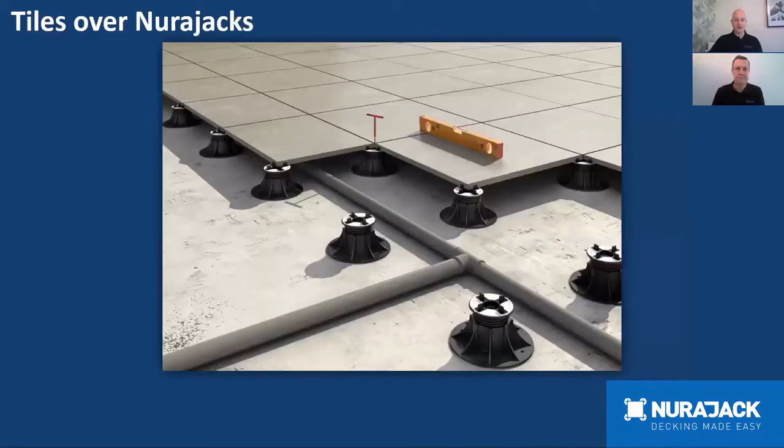Now, some of the features of the Nurajack system. By using Nurajacks, you can create a level deck surface over a sloping substrate and create a level entry into the home. The head of the Nurajack self-adjusts to 4.5 degrees, and each Nurajack takes around 1 ton of weight. The height can be easily adjusted just by winding the thread up and down, or, as you can see in the picture, using the adjustment key in between the tiles to make minor adjustments to the height. And we're very proud to say that Nurajacks are made from 100% recycled materials.

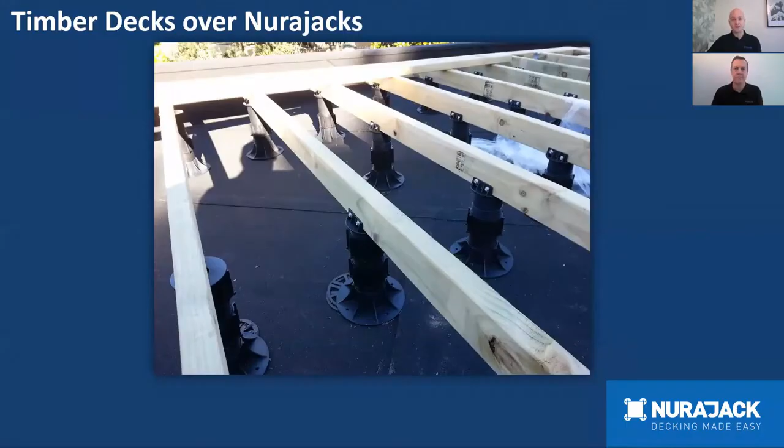So tiles can be used over Nurajacks. Also, Nurajacks can be used to support timber decks over membrane and over concrete. And Nurajacks can be used to support timber decks going out over grass or dirt by using the Nuraspike system. You can see there, Nuraspike in the ground, Nurajack on top, and then you're into your deck construction. We've got some really good documentation of projects that we've done using Nuraspikes, so feel free to check those out on our website or on our social media, Instagram and Facebook. That's a really quick overview of some of the features.

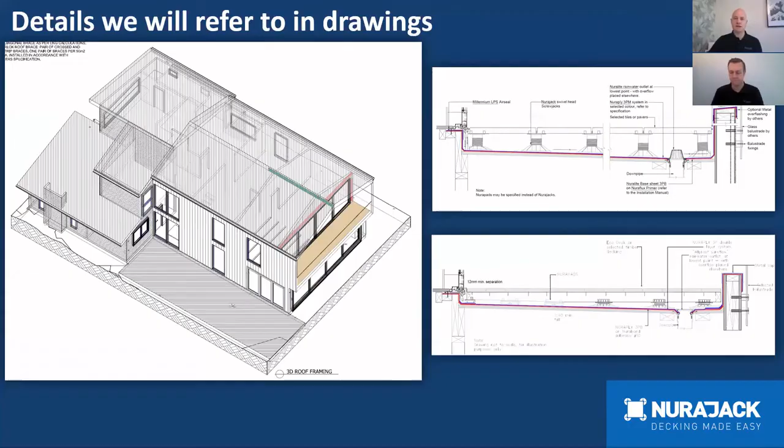Obviously, if it's over membrane, it's going to be specified on the plan, but if it's on the concrete, that's something that we need to work out, but we'll talk you through how to do that. So they're the four critical measurements that you need to put into the calculator. So let's crack on with that first example, and we'll ask Lewis to take us through quantifying Nurajacks for tile decks.

Thank you, Mikey. As you're probably aware, Nuralite has been promoting and selling the Nurajack for almost 15 years now. And one of the projects is this one here. That was Justice Precinct in Christchurch, quite a large project for us.

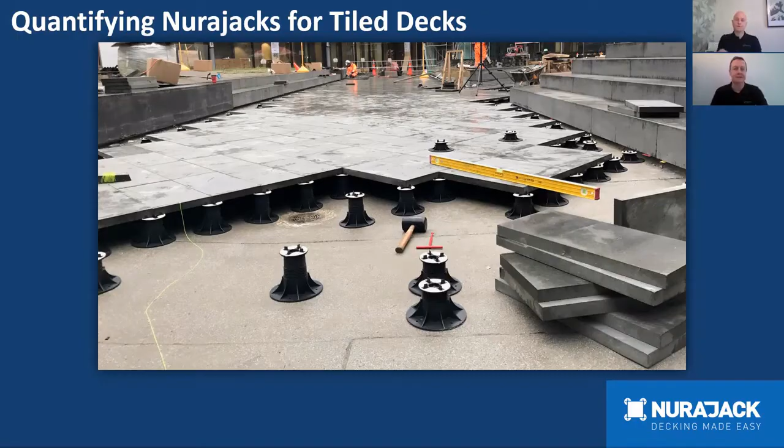Now quantifying tiles, what we're going to do is we're going to focus on that same drawing, and we're going to just focus in on this membrane deck here. Now, we'll have to make a few assumptions on this deck. So I've drawn out a basic plan drawing. You can see here that the ranch sliders are down this one side here. I've annotated that in blue.

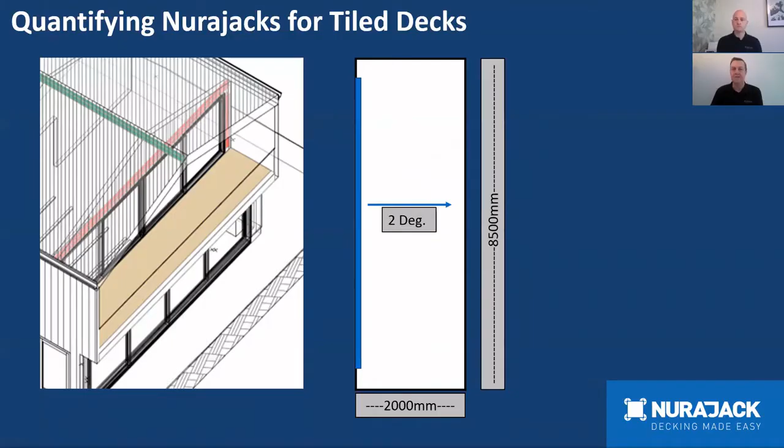The size of the deck is 8.5 meters by 2 meters, and it has a 2-degree fall. So those are critical pieces of information. 2-degree fall, 8.5 by 2 meter deck. Also, we need to know the height at the door threshold. E2AS1 dictates 100 millimeters of height between the bottom of the membrane and the door threshold. So that's what we call the membrane upstand, and that needs to be, according to E2AS1, 100 millimeters. So we're just going to make that assumption that that's the case with this project.

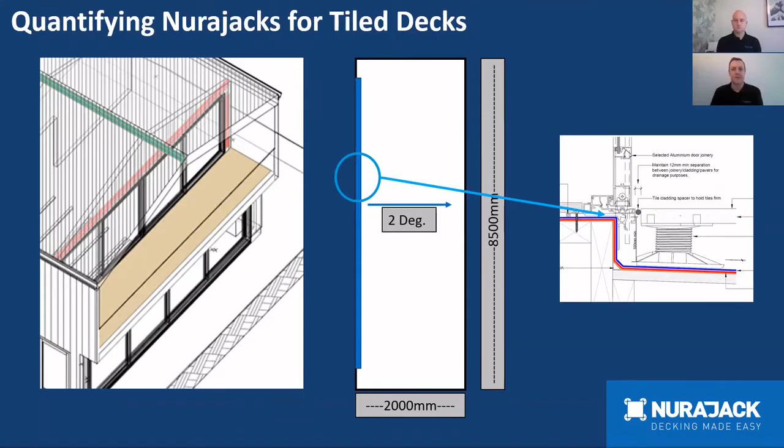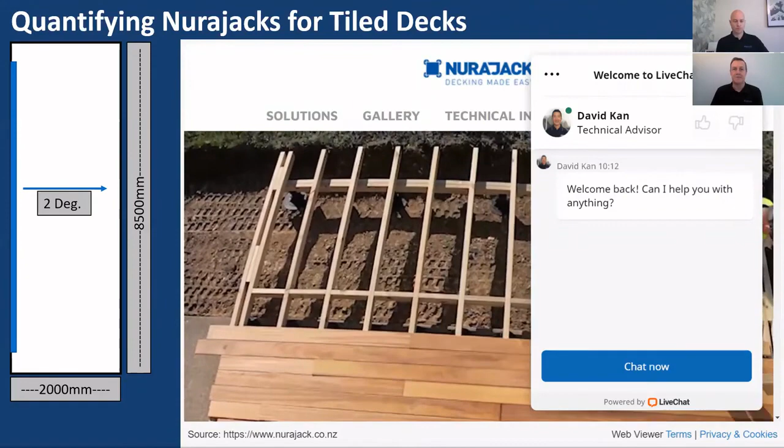Now, how do we go about calculating this deck? Well, you go to our website, nurajack.co.nz. There's a number of great features about the website. One of the most popular features is our live chat feature here. You can see that David Kan is actually manning live chat this morning. So if we were to ask a question right there, he'll be able to respond straight away. So we'll just minimize that down and we'll go to the quantity calculator.

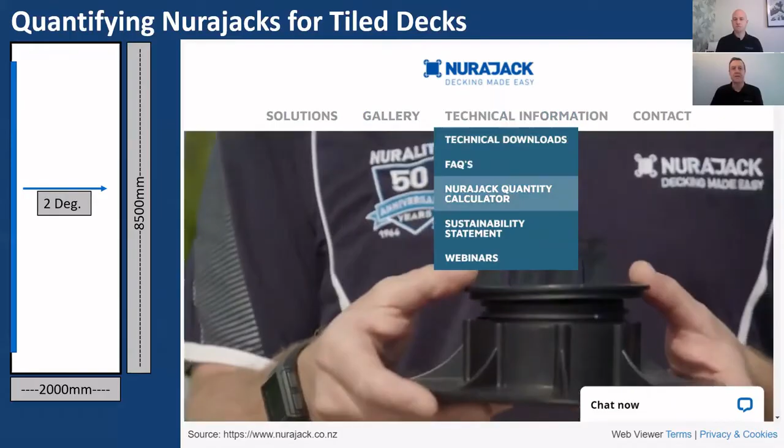So to find the quantity calculator, go to technical information, Nurajack quantity calculator. And when the quantity calculator comes up, we can scroll down. And because the surface we want is tile, click on tile. Now we get into the tile deck quantity calculator. The first section is dimensions. So we just need to transpose the information from here into this section here. So first of all, we have a 8.5 meter deck that is long or across the fall. Down the fall, we have a 2 meter dimension going down.

Oh, what's going on there? Sorry, giving you a preview of the rest of our presentation there. Sorry about that. Doesn't happen when you're practicing, does it, Mike?

So it's a 2-degree fall, as we've mentioned. We want to know the deck width down that fall. In this case, it's 2 meters. Now, what's the tile size, the tile dimensions? Well, we're going to be a little bit tricky here and have a 1200 millimeter by 600 millimeter tile. And that's becoming a more popular format in tile and paver.

The gap between the tile and the cladding, so around the perimeter, what gap are you proposing? E2AS1 requires a 12 millimeter gap, but there are some other options there based on our tile cladding spacers. Have a look at our other webinars or our website to find out what they are. And then the thickness of the tile. In this case, we're going to choose a 50 mil concrete paver, stone paver like what we saw in the image from the Justice Precinct.

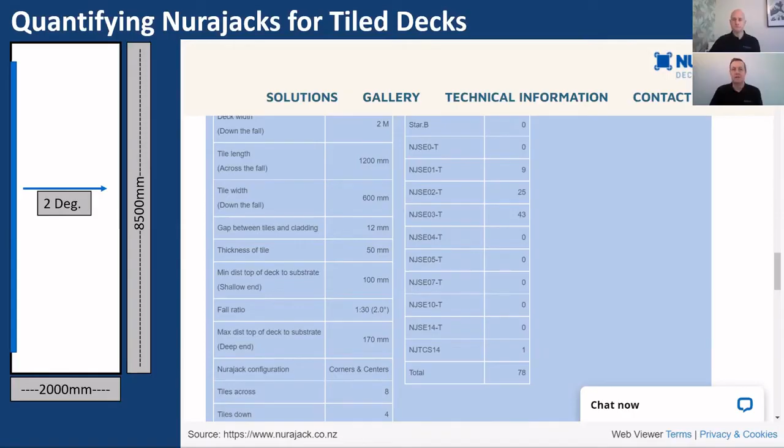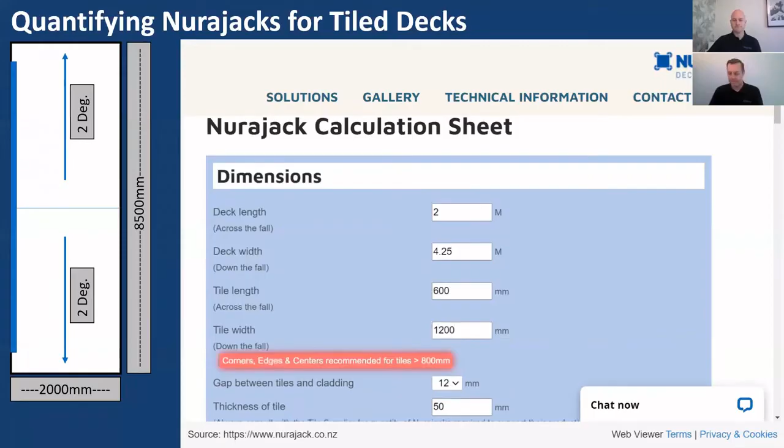So instead of being 8.5 meters long, it's now going to be 2 meters long. And it's now going to be 4.25 meters wide, because what we're doing here again is we're halving this. We're just looking now at this area. Again, to keep the tiles running in the right direction, we'll need to change the format of those. But other than that, the information is going to stay the same because this hip that runs through here will likely be 100 millimeters below that door threshold. Again, it's 2 degrees of fall, so we'll leave that the way it is.

And now when we get to the tile layout or set out, where to cut the tiles, we need to change this so that we actually have a deep cut. The cut is at the deep end of the deck. So we want to have the smaller cut tile here with a large full cut tile here. Okay, that's quite critical. Now, as we scroll down the page, we can see that we have a new calculation here for the deck profile. When we go to the plan, we can see that we've got these smaller cut tiles down the deep end of the balcony, and the large full cut tiles at the shallow end. So the full cut tiles here.

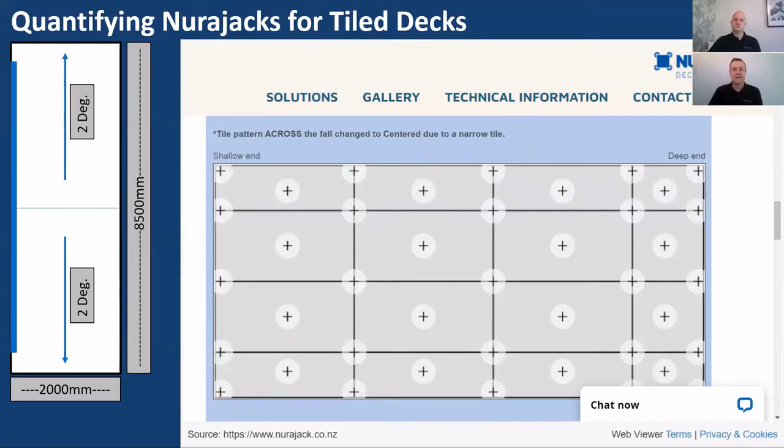And then as we scroll down, we'll get the totals that we need for half of the deck. Now remember, to get the whole deck, you double that, but then take out that first row of SE1s that will be used here. So double the whole thing and then take out one row, because that row is then shared with this deck here. I hope that makes sense.

But what the calculator can do is give you the overall quantity of what is required in that whole scenario. And then you can just either apply a ratio or actually go on site, set up a laser and figure out the heights that you need. So it'll still be able to give you the number of tiles involved and the number of jacks that are involved, just not the heights. So I hope that sort of explains the tile side of things.

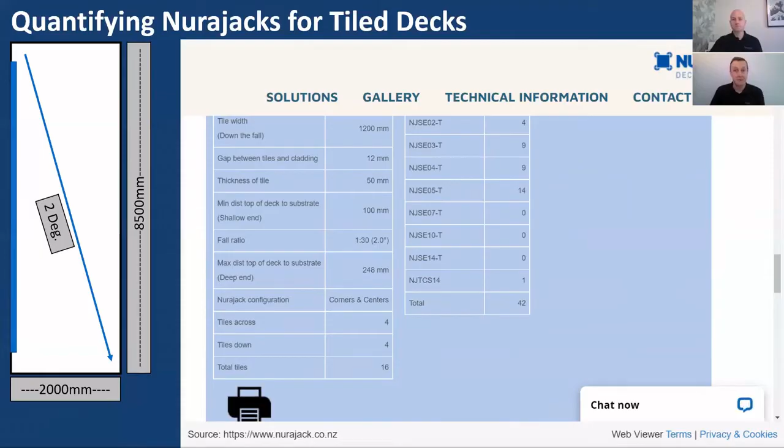What we're going to do now is take you through the same process, but with estimating for a timber deck. And Mike's our timber specialist, so we'll get him to run through that. Nice, thanks, Louis. So for this one, we're going to look at that ground floor plan on our drawing, and we're going to imagine that in 3 different scenarios. So first of all, just concrete, just grass, and then concrete and grass.

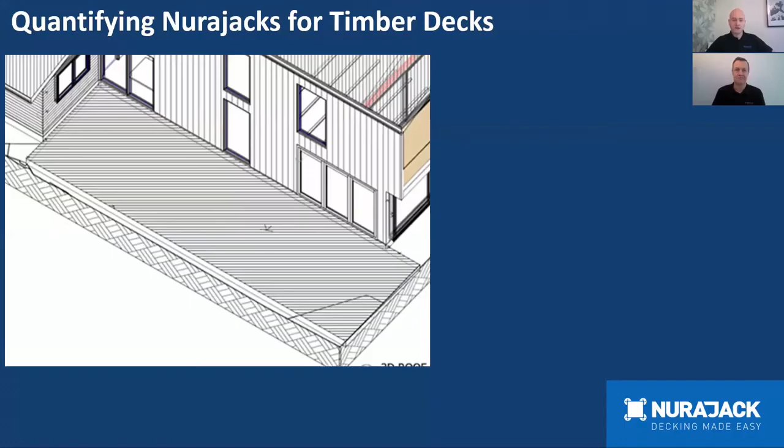And those critical measurements that we're looking for, again, we want the dimensions of our deck. So we're looking at the length and the width. For this scenario, we're going to say it's a 5 meter by a 3 meter deck. We need the height from the high point of our substrate to the top of our deck. If it's over membrane, like Louis said, it's around about 100 millimeters. If it's concrete, it's about 150.

And then we need the build-up of our deck. So the thickness of our decking, and then the thickness of our joist, and also the pitch of fall. What angle that concrete is running away from the house on.

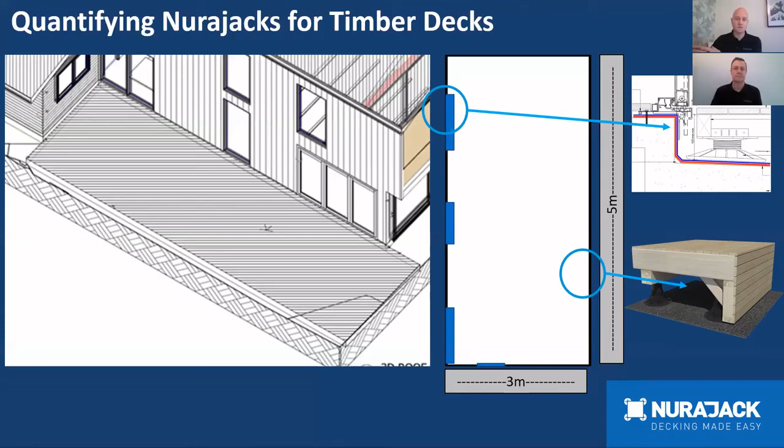Now, just a little side point here as well. You can see the render right down the bottom, see our deck and then how those baseboards are framed up. This is just one scenario that you can use if the perimeter of your deck doesn't finish into cladding or into a balustrade. Then the builder can just make some droppers down off his joist at the boundary there, brace them back up to the joist, and then he can fix his baseboards to those droppers rather than screwing baseboards into the side of the jack because it's not a flat surface. A little bit of framing there. So just a side point, something to keep in mind.

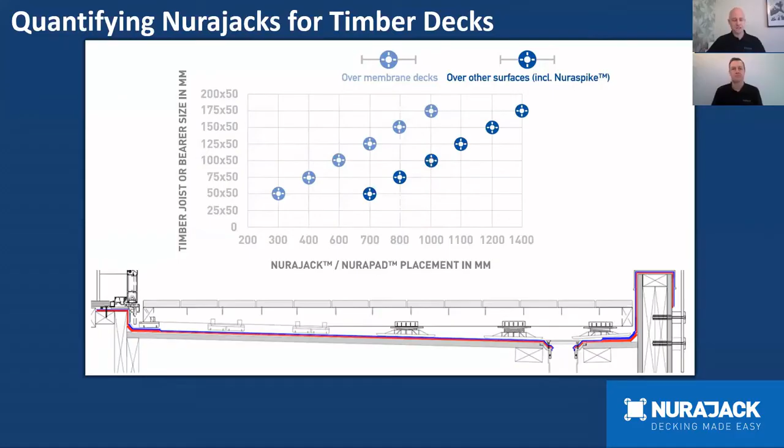The depth of our joist, we're going to use 4x2, so we'll keep that at 100. The minimum distance from the top of the deck to the substrate, we're going to make that 120 mils. So that's top of concrete to where we want our deck to finish at the high point. The fall ratio, we'll keep that the same, 1.5 degrees. Then we'll go down. So the length of our deck is 5 meters and the width is 3 meters.

Now our next box is our bearers and substrate. So is the deck over membrane? No. So we'll click no. Do we want to use a bearer? No, because there's not enough height. Do we want to use Nuraspikes? No, we don't, because we're going straight onto the concrete.

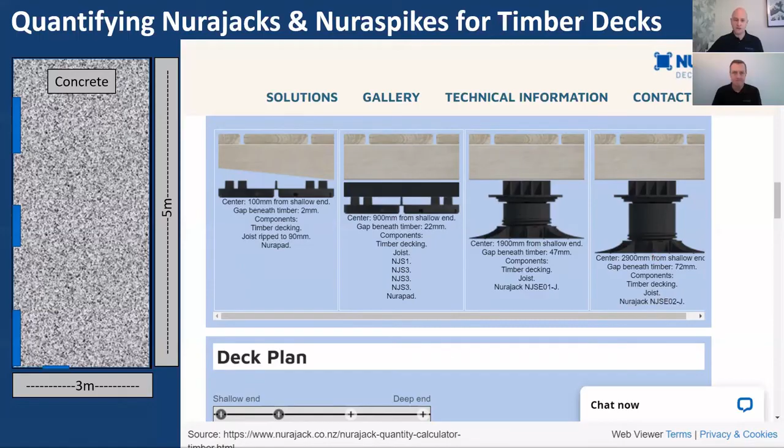And you can also see that it gives us the centers, or where we want to space our Nurajacks under our joist. If we go down, we can see the deck plan. And this is really awesome when it comes to constructing it. Basically, we can see exactly where the calculator has told us that we need our Nurapads. So those dark circles are our Nurapads, and then the lighter ones are our Nurajacks, and we can see how our joists are spaced there. You can see the key at the bottom. So Nurapads are the dark ones, Nurajacks the lighter ones, and then Nuraspikes, we'll get to those soon.

Now, if we scroll down, this gives us the breakdown. So we've got all our input values that we've put in back at the top. And you can see the box there just at the bottom of your screen. If you just scroll down a bit, Louis, you can see the joist quantity. So it tells us how many joists we need. And then it also tells us our joist spacing. So we've got 436 there, so we're not going over that 450. And it will tell us as well how far apart our Nurajacks are spaced underneath each joist.

Then we've got our quantities on the side there. So however many Nurapads, shims and jacks that we need. So that's simple for going over concrete.

Now we'll go back up and we'll pretend that the same size area is over grass. So we'll keep our decking the same, we'll keep our joist the same. What we're going to change is the minimum distance from the top of the deck to the substrate. We're going to make that 250 mils here. And then our fall ratio, we'll keep that the same as well. Now you might wonder, how do I know the pitch of fall that my grass is on? Well, there's another way that we can check that, but we're going to guesstimate that the grass is falling away from the house here at about that degree. Our deck length and width is the same.

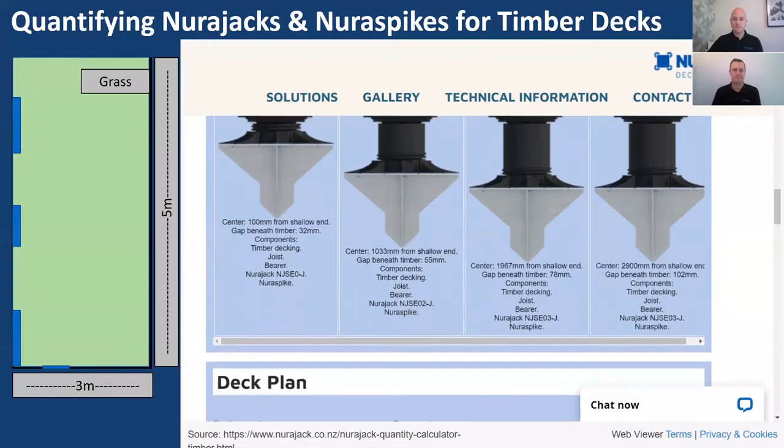And then if we go down again to our deck plan, awesome little plan there of the layout of the deck. So you can see the red dots are the Nuraspikes, those thick dark lines are our bearers, and then the thin darker lines there are our joist. So if you're putting all those values into the calculator, that basically shows you what the calculator has calculated and how it's done it so that you can construct it. So you've got no jacks and spikes left over, or you don't come up short when you're building it.

And if we go down again to our breakdown, again, we've got all our values in there. It tells us our joist spacing, our joist quantity, our bearer quantity. So it's told us that we're going to use 4 bearers, the size of the bearer, and also the Nurajack spacing along the bearer. So that'll help us to know where we want to put our Nurajacks. And then on the other side, it's given us a complete rundown of what we need. So that's cool.

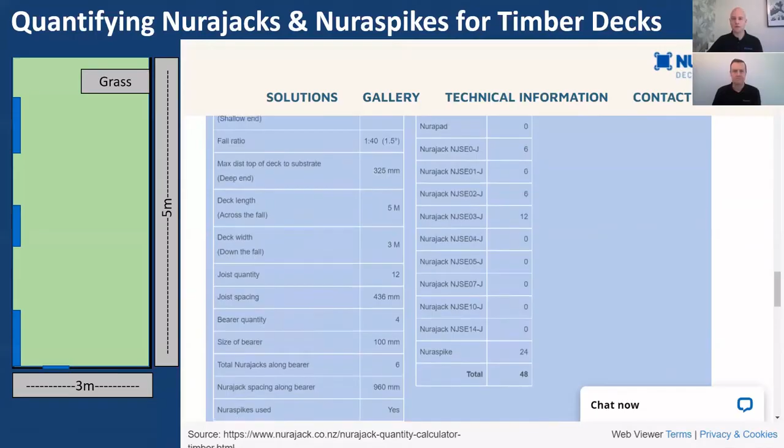Now for the last example, we're going to imagine that there is a concrete pathway running off the house. So we'll keep all of those deck dimensions the same. We'll just go down to our bearers and substrate here. Now we're going to say that this pathway is coming off the house at 1.5 meters. So we're going to change the distance from the shallow end where the soil starts in that box to 1.5

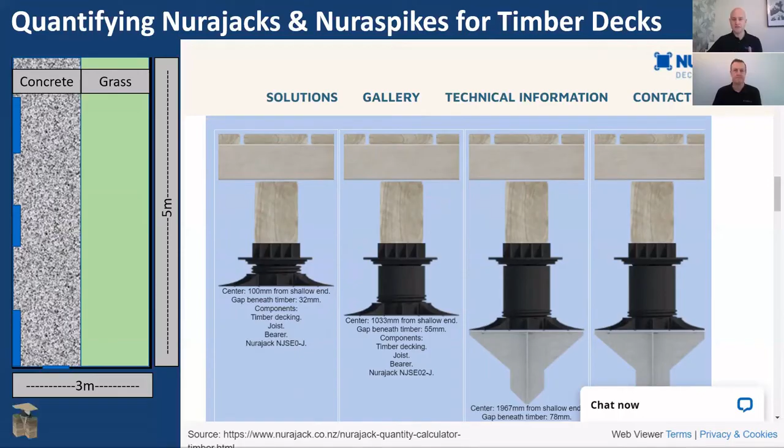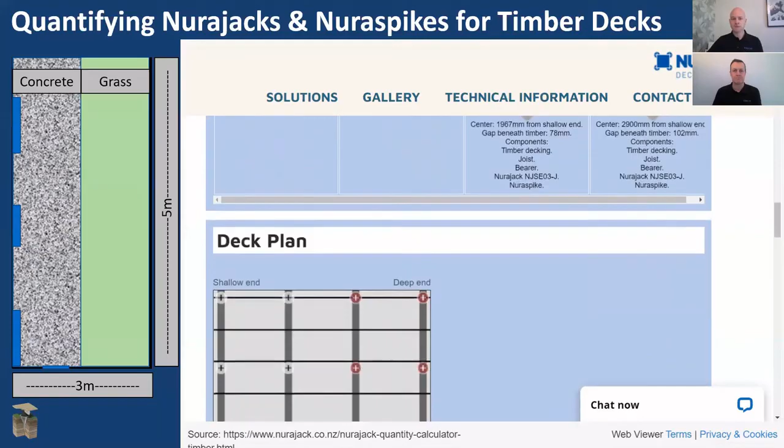meters. And then we go down and our joist profile there shows the first 2 bearer lines and the lines of Nurajacks are on concrete. So it deletes the Nuraspike, shows those sitting on concrete. And then the last 2 bearer lines, it shows those sitting on the Nuraspikes. So if we go down again, that translates that at our deck plan. And we can see it's converted those 2 first bearer lines to just be sitting on the Nurajacks, and then the last 2 on the Nuraspikes.

So obviously that's the perfect sort of scenario with a deck. Obviously, if you've got a little dog leg or a jut out, you'll need to do those separately, but at least you can see the bulk of the deck is set out this way, and that's going to help you give an estimation of what you need.

So just to review those critical measurements that we need to put into the calculator, obviously we need the area of our deck, so the length and the width. We need the height from the high point of the substrate to where we want our deck to finish, the build-up of our deck, so our joist size and our decking size, and then the pitch of fall as well. So we want all those things to go into the calculator, and that'll help you estimate what you need

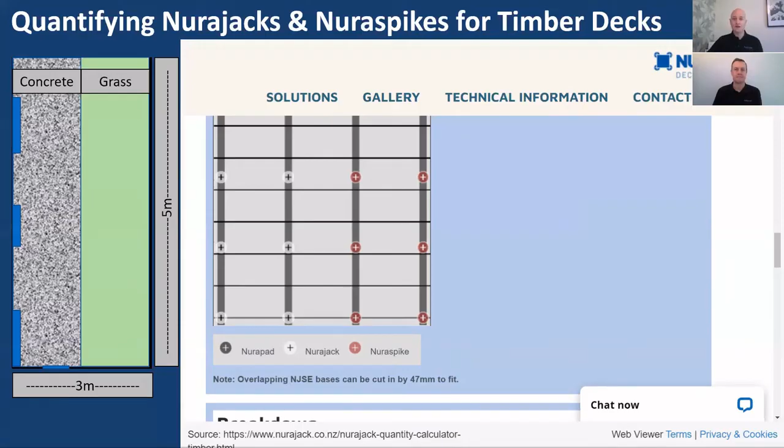for your project. So yeah, we've found great value in the calculator. We know that you will too when you're estimating for plans or you're doing a little home project or a project for a customer. It's going to be of value to you as well.

Thank you, Louis. Back to you. Thank you, Mikey. Appreciate that. A couple of questions have just come through.

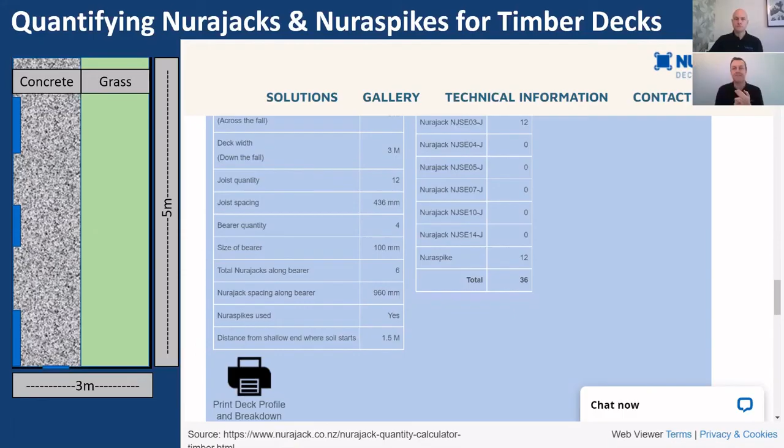Now, if you've done it on your phone, which many of us do, where maybe you're on site and you want to measure on your phone, we actually produce plain text instructions here at the bottom of the screen. It has all the points laid out as they were in the profile, and you can just copy that to your clipboard and again send that to your preferred supplier, and they'll be able to quote or order the product for you. So that's something that we did miss from the webinar.

Well, we've got time for just one or two more questions. Do higher Nurajacks need lateral bracing? Our tallest Nurajack is the SE14, and it's adjustable up to 550 millimeters. If you're using an 8x2 bearer and an 8x2 joist, you're going to be well under a meter, and that doesn't require bracing if you're under a meter.

If you have concerns around that, though, we've seen Nurajacks installed actually over a meter tall, and often they're constrained by the surrounds, so they don't move. But in a typical backyard type scenario, as soon as you need cross bracing, you'd need to go to a traditional pile. So we recommend decks under a meter tall for our Nurajack system. I think I've just answered the second question there, Perry, by answering that.

Okay, when estimating plans where no fall is specified, so off the plans and they haven't shown the falls, what fall would you use? Well, if it's in the Auckland region, the Auckland City Council requires 2 degrees of fall typically. If it's outside of Auckland and you're using particularly a TPO or a butyl type membrane, 1.5 degrees fall is what E2AS1 requires.